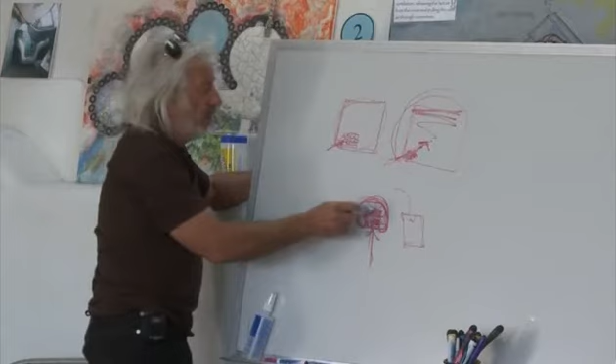People, all the engineers and scientists, were trying to build mass into houses. We were already fooling around with building houses out of beer cans, so we looked around at what else there was a lot of on this planet, and it was tires. We started stuffing dirt into tires and beating it into them.

So you have a tire that is a steel-belted rubber casing, and you beat it full of earth. You have a 2.5-foot thick chunk of mass encased in steel-belted rubber. The material you're using is dirt, which is everywhere. Tires are really everywhere - indigenous to the entire planet. If you came here from another planet and saw all the tire piles, you'd think they grew here just like trees. And in fact, they do.

We've been everywhere - Bolivia, India, everywhere we go, they've got tires just like they have trees. So they actually have a problem with tires. You never hear anybody saying there are too many trees, but you do hear people saying there are too many tires, and too many people probably. But anyway, tires are indigenous to the entire planet.

They're a great, massive way to build. They're low tech, don't require equipment, require very little training. When we were trying to evolve a method of building a mass building, we stumbled onto this, and that was 30 years ago, and we really haven't found anything better. In other words, if I found some better way to achieve a massive structure, I would use it immediately, but I haven't.

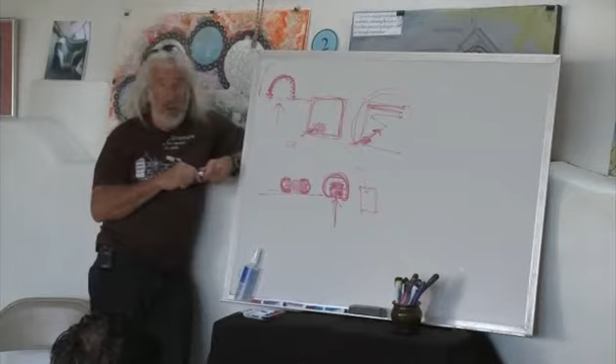So what that did is launch us into taking this science a little further, like in the early sections. What I'm getting you to do is understand why these designs are the way they are. People come here to build these for a living, for themselves, or to share the information, and it's important to know we're not doing these because they look cute. We're doing them because we keep finding more ways to fine-tune this encounter with natural phenomena—the sun and the thermal mass in the earth.

And the thermal mass concept—so what we have is a section that we used to just have the tires stacked up, and here we have a roof like this. We've evolved out of that, and I'll talk more about that in the water situation.

This is the angle in this building—this is the angle of the winter sun, to bring the winter sun in here. Even on corner cottage, I believe we still have this. We do this roof slope to let the sun melt snow before it evaporates. But we've evolved out of that.

So this was our configuration 10 years ago. The configuration now has evolved—we've gotten a way to melt the water with the sun, which makes for more details and expense. So now the newer designs, which we call the global design, have a roof that is one configuration, one line.

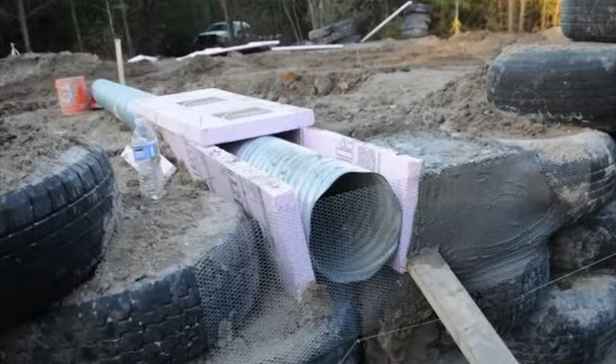And these tubes are buried in the berm. So we have what I think physicists call a convection engine, convection-driven air movement. No fans, nothing, but there is air moving.

People would sit around this at lunch because they're coming in from working outside in 105 degrees, and sit around these tubes and put their bottles of water in them and all kinds of stuff. You could see it was working. And this is with no fuel.

So now we've taken this configuration that we got busted for a decade or so ago and taken it further, removed the heat loss of the skylight, created even better ventilation, and done one more thing.

We do now what we call a thermal wrap, and you can see this. I think we've got one under construction called the Global, across from Corner Cottage.

Thermal wrap is where we take rigid insulation and go out another 3 feet from the tires. So now we have trapped more actual earth mass to work with the tires. The tires become the structure and mass, but we're adding another 3 feet to that mass by isolating it away from the cooler earth, because it's the cool earth that cools off this air.

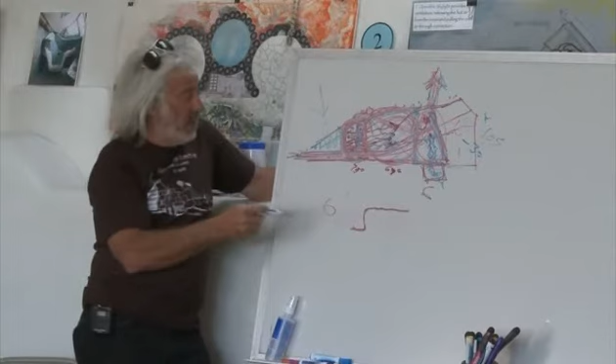I'll get into that. But if you're playing with an idea that has to be purchased, it's got to be the same price as the other things on the market. So manufactured housing is what is the biggest seller, that's what people buy. So we came up with a package design that worked for that, and it just had a vertical face. We call it the package design because it was so simple that we could provide a kit almost that people could just put together, and we could make components.

We were aiming at making this more user-friendly, because these older buildings had a lot of strange details that required more skill. So we were trying to make it so you could just assemble the building. And they worked pretty good. We did a lot of them.

And then we added a double greenhouse to it. And then we got rid of the sloped roof because we decided we could heat the roof with solar rather than having to have it shaped to face the sun. So the package evolved into a double greenhouse package, and that evolved into what we call the global Earthship. We've got a lot of these going around the world now.

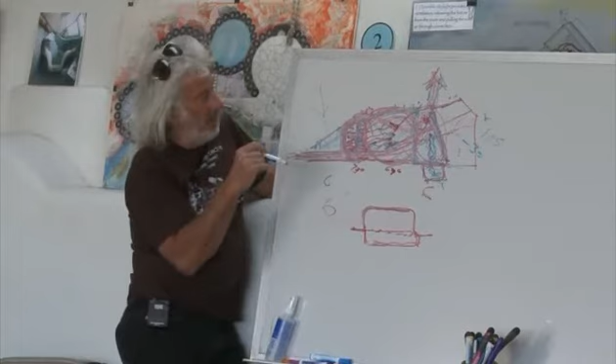We can do one of these, like we just came back from Miles City in Montana, where we put one up in 8 weeks, totally turnkey, everything working, 2-bedroom. So we got the time down, we've got it to the point where this is a product now that we're ready to take out there.

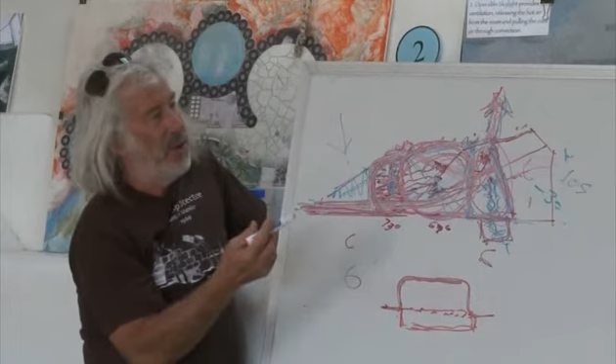There are 6 points to these buildings, most of which, half of which at least, I'm going into tomorrow. They are built where, everybody's looking at carbon zero these days, and so building with recycled materials is a huge thing. That's part of the rationale for using tires, but not the only rationale for sure.

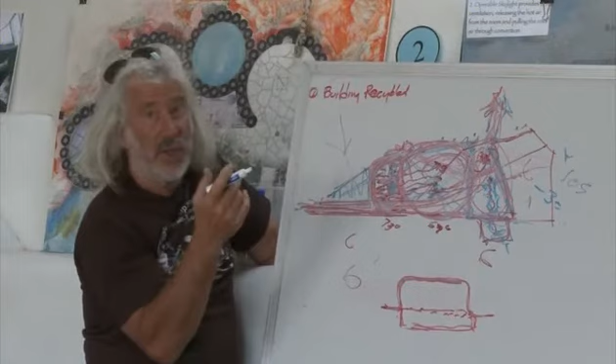And the cans and the bottles, we were doing that before we were doing anything. Building buildings out of cans just because the media started screaming about garbage being thrown everywhere, 30 years ago, 40 years ago, and it hasn't stopped. So we were doing that before the word recycling was even a word.

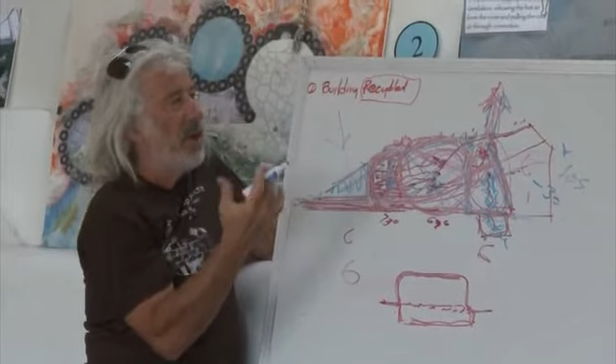So in terms of a carbon zero building, if you're using a material like tires or bottles or cans that is taking the place of a manufactured material, and that manufactured material takes energy to manufacture, you're starting off with a material that doesn't have to be manufactured. There's a double thing there - it also takes energy to do something with the cans and tires and bottles, so you're getting rid of that energy because you're using them rather than using energy to get rid of them.

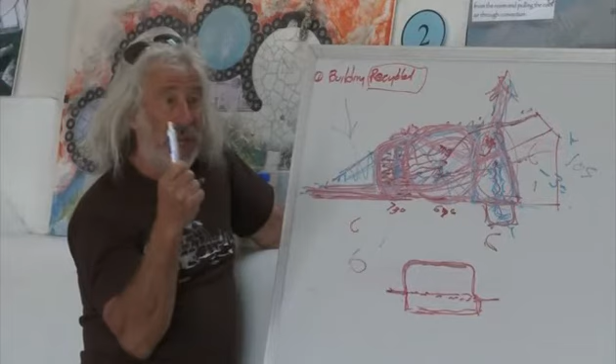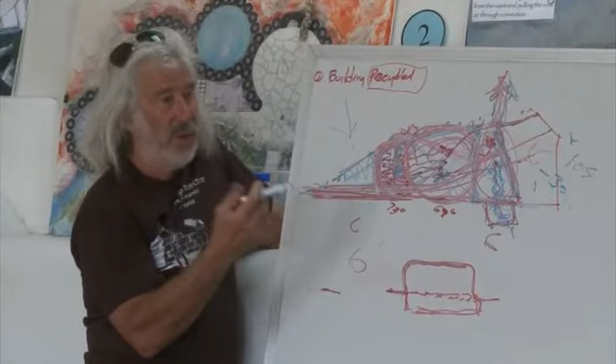I was in Norway recently, and they have a giant recycling company, but the energy used to recycle all these materials is unbelievable, really. And then they ship them somewhere. So shipping - you're taking the place of shipping because you're using a product that's laying around. You're taking the place of manufacturing because you're using a product that's already manufactured. And you're taking the place of disposing of garbage because you're using garbage. So there's 3 ways these buildings start off with actually a negative carbon footprint when you're going out there and pounding dirt into tires - it starts off negative because of building with recycled materials.

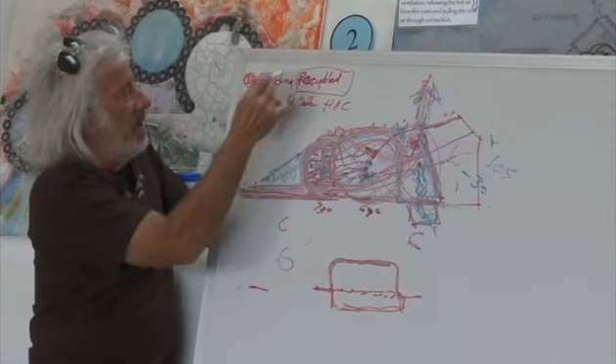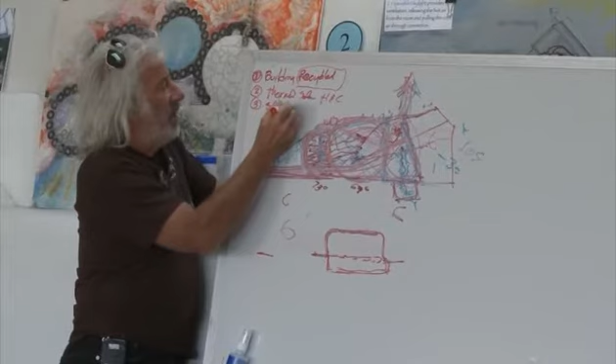Then thermal solar, which is what I've just been talking about, heating and cooling - these are the major points of these buildings: thermal solar heating and cooling, building with recycled materials. The design of the buildings is a result of what it takes to use recycled materials and what it takes to achieve thermal solar heating and cooling, and you can see how it's evolved. And then solar and wind energy, of course, which we'll go into tomorrow, and water from the sky, harvesting water.

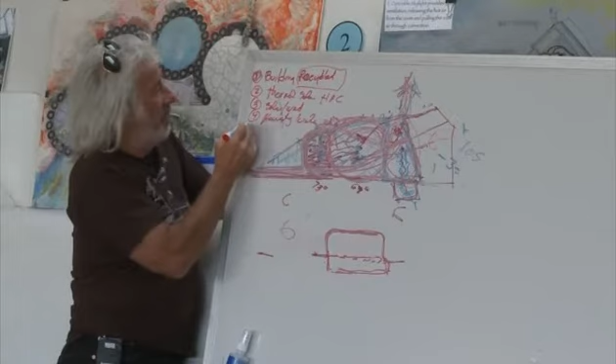And then contained on-site sewage treatment. This gets you off the grid, and sewage treatment is getting to be a big deal because sewage treatment plants halfway treat it, which takes a lot of energy, no pun intended. So it takes a lot of energy to treat sewage, and sewage is a valuable thing. Sewage to me is gold. It's compost. It's providing energy for food production, which is the sixth point.

So if we can make a building that addresses all of these issues, who needs the government? Only to hinder us from doing it.

Doesn't it also regreen, because the blackwater plants grow that wouldn't normally grow there? Yeah, and if you get to see some of the older Earthships, I have a great picture in one of my shows that shows one of the buildings here, and you've got the barren, deserty mesa, and his blackwater system, which I'll go into tomorrow how they work, has just gone off.

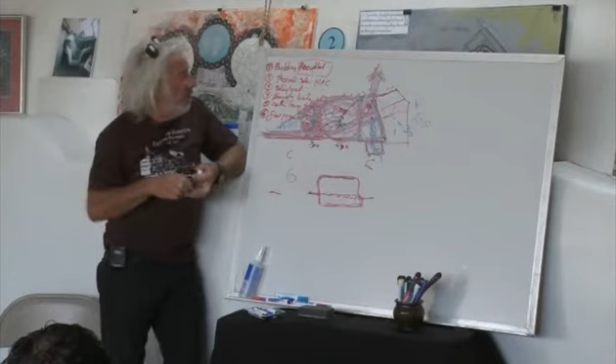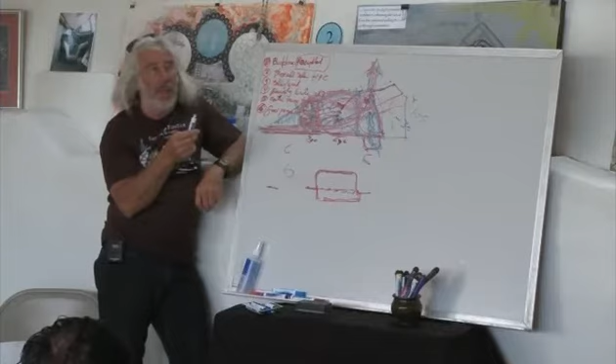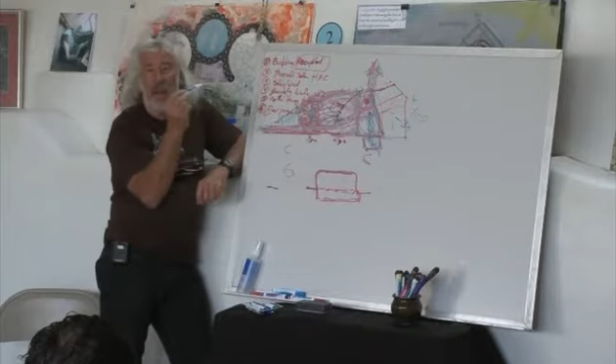But just think of this in terms of the issues in the cities and other countries, how much of a garbage problem there is. New York City's taking it out in barges and dumping it in the ocean. Everywhere I go, the first thing they do is take me to the dump, and there's mountains of tires and bottles and piles of refrigerators and ranges. We've got ways to use all of that. I imagine Kirsten showed you how we use the washing machine and refrigerator panels. That's new in the last four or so years.

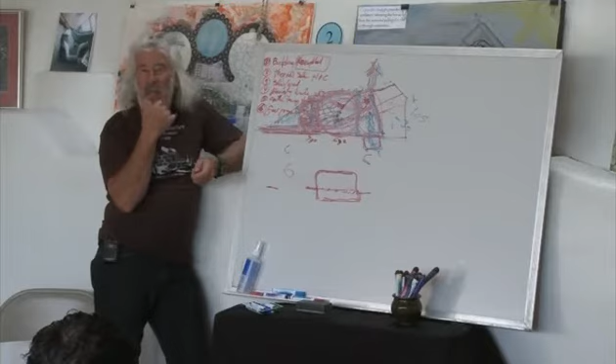I was in Hawaii talking to grade school kids, and they took me to the dump, of course. It was the little island of Molokai, and that's where I first got this idea. I'd seen this before, but there was a big mountain of refrigerators, ranges, washing machines, appliances that went bad. We had been switching our roof material to metal because metal catches cleaner water, and this mountain of washing machines were all full of baked-on enamel yellow and green panels of metal, nice colors and everything.

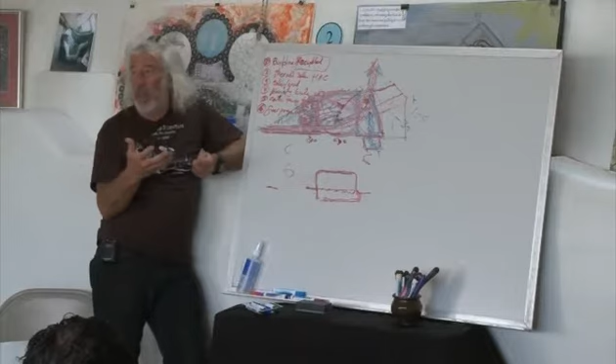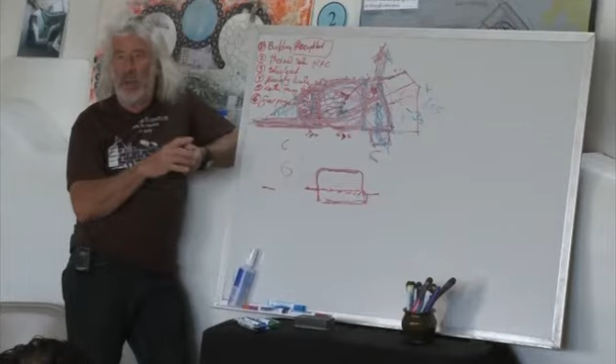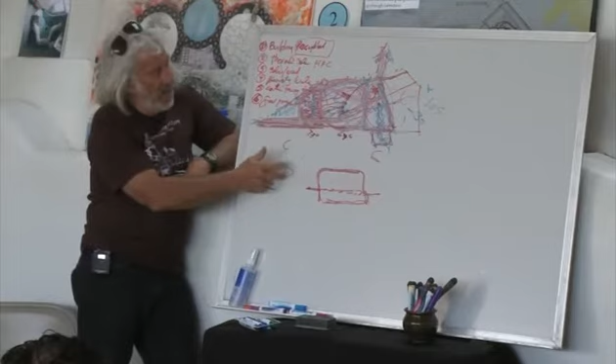So after I came home from that trip, we went to our dump, and sure enough there was a mountain of refrigerators and ranges. So the crew went out there. We took a solar array and a solar trailer so we could plug in electric snippers. If this is a panel on a washing machine, you just stab the corner of it, make a hole, take the electric snippers and snip it out, and you've got a panel. So we just go to the dump and harvest metal.

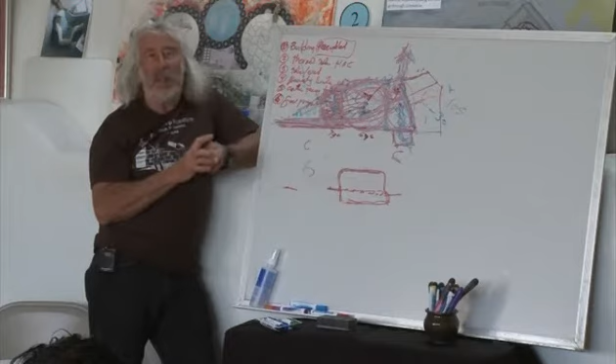You'll see it when you go to Corner Cottage, it's got some of it; across the street the New Global has some of it; and the Phoenix has got the best application of it. It's like artwork there. As a matter of fact, I just got a new 1970-something Mercedes that was all beat up, and we patched up the body with washing machine parts. It's beautiful, looks like paint swatches you find at the paint store. We found a couple of pink ones here and there, and we really like the pink, so we painted some panels pink with metal paint.

But anyway, we're harvesting metal now out of the dump for roofing. Every city and country has serious issues with garbage, in terms of what to do with it. When they do something like Norway does with it, to me that was scary. They had a factory of machines chewing up energy and trucks hauling it off to other parts of the world. To me that was insane. They thought it was great that they had such a giant recycling situation, but I was just seeing energy used like crazy to recycle.

All we're doing is gathering stuff from the dump: bottles, cans, tires, cardboard, washing machine parts, and we'll continue to find other goodies. So building with recycled materials is just a logical thing. There's really good materials, and in fact I can't find, manufactured or not, a better material than tires to build with. If somebody gave me $30 million and said develop the best building material you can find, I'd probably invent a tire.

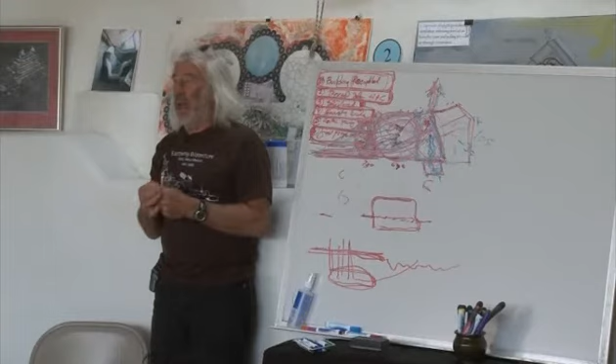And I have, for the last year, had a garbage can sitting in my office full of compost, reading out the thermometer as it was going up. The guys helping me, I sent them to Walmart to get me a garbage can. I told them what I was going to use it for, but they just didn't snap to it, and they came back with a plastic garbage can, which would have just melted.

But this heat bulb thing is just another trick involving biology and physics, to buy more heat without actual fuel. So this is how we're taking this to areas where there's ridiculously less sun. But every city and country is facing all these issues, and we've taken each one of them. If you consider these like systems of the human body, we've interwoven them, and they're all interrelated to come up with this building now that we call the global Earthship.

And we have a couple of examples of it here, and everything else is a prototype leading up to it. The Phoenix is the best example of all of this put together in a more flamboyant way. It's not what I would call an affordable application of all this, but it certainly shows it in the most intense way that we can. So what I'm getting at is, through the last few decades, we have evolved each one of these things seriously.

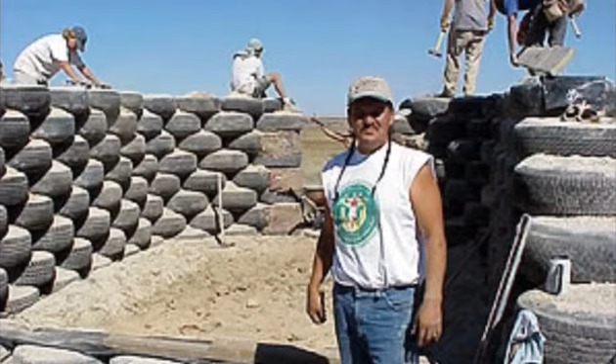And so they have land now. They have a lot of money from gambling, and they got no rules. They could take the lead. Third world countries can take the lead because they aren't encumbered by all these rules and regulations. And in this country, we're taking a map of the U.S., whatever it's shaped like, and...

We're going to map it online because there's these places we call pockets of freedom, like Montana. It's actually, this is supposed to be a free country. Well, let me tell you about it. But there are places like that.

We've just noticed this recently, but we've got people selling drawings all over the world and then hacking through the permit process with them and sending off engineer reports and tests and studies and all kinds of stuff.

So it slows down the process of getting carbon zero building out there. And it's not, I can't really find whose fault it is. It's just the human condition has woven a set of rules around itself in the developed world to the point where they can't evolve without taking a tremendous amount of effort and time, and we don't have that.

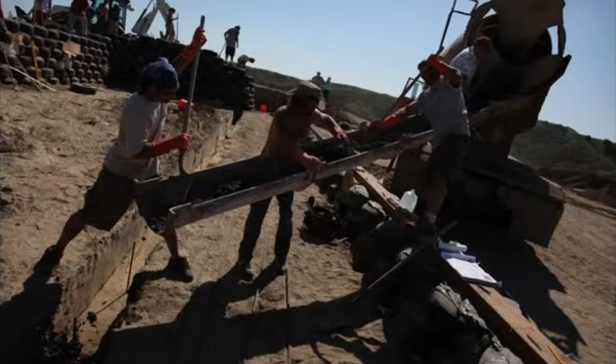So it's an extreme contrast to have somebody walk in our office and a month later we're building a building for them in Montana. And that's happening. It happened twice in Montana, now it's happening in Texas.

So what we're going to do is map the counties in every state, because this county that we did this building in, Miles City, you don't need any permits. In Montana, is the governor Schweitzer?

Does he know what you guys are doing? Because I'm not sure. As a result of our build there, they're wanting us to tell them about our gray water system and things like that. But I imagine it everywhere we go. It gets in the paper, so I imagine they're aware of it.

We're not sure whether we're going to do harm or good by pointing this out, but you take Montana and Idaho and the Dakotas and you start coloring in all these counties where you don't need permits. And now in Texas, we're in East Texas, no permit needed.

In other words, the guy came in on East Texas. He came and stayed in Corner Cottage a few weeks ago. We're going down there in 3 weeks to throw up a building for him. No permit needed. So what I'm saying is green carbon zero housing can, boom, exist instantly in lots of places around the U.S.

And then, this is almost like the maps they make of the Democrats and the Republicans. You got the map of where you're free to take care of yourself and where you're not free. And it could be that a lot of people end up moving because it's beautiful land. See, some of the most beautiful land in the country is what they say is worthless because it has no utilities. And it's also worthless because it doesn't have any rules and regulations.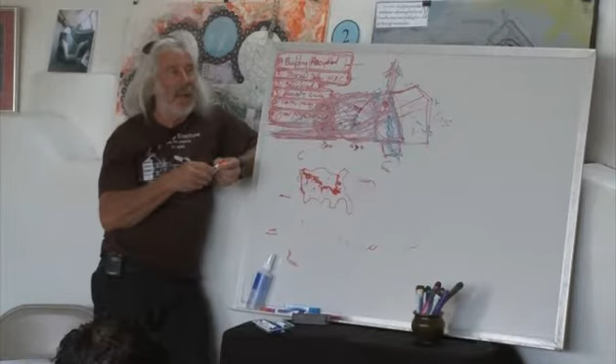So there's a lot of that in this country. There's a whole lot of it in the rest of the world. Europe is one of the worst for not having it, but there are pockets in Europe too. So there are places where what we're saying now is, yes, we're still working on the codes and regulations and trying to go through the regular path, which is more time consuming and so on.

But at the same time, we are going for these pockets of freedom. We have sort of got one here because of 2 decades of fighting.

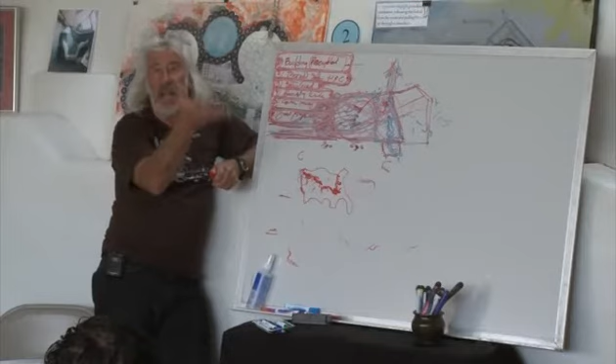I'm just curious, has your fight gotten any easier now that you've found these pockets where you've built them and proven that it can be successful? Are there other areas that have been fighting you that are becoming a little easier to get this done?

Well, there's no question that with the media, now it used to be global warming was kind of a freaky thing you didn't talk about, and now it's everywhere.

Every time you turn on the television, there's something about climate change. So it is getting easier - people are at least listening and looking at it, but they always come back to the same thing: it's a government employee with a rule book, and he'll lose his job if he doesn't enforce it. I've even had him apologize to me for having to enforce it.

We introduced this law and fought through it for 4 years. And so I realized, yeah, you can make new law and change things, but we don't have 4 years - we need to do this every week, every month. So we've now evolved the law into what is known as an executive order.

An executive order is a tool that any governor or president has. We wrote one for the governor of Arizona and for the governor of New Mexico, who's now on board with us, so to speak.

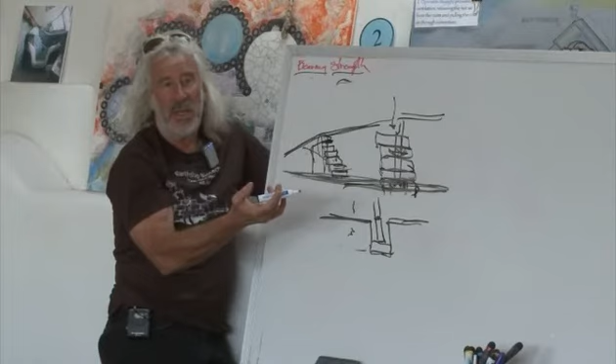So in a buried Earthship, we recreate the frost line to the point where it has no effect on the building. The greenhouse out front usually has a couple of tires, sometimes 3, and we put the leaning face on the greenhouse, then insulate that, bury it out a little. It's the insulation again that keeps the frost line from getting into the bearing of the tires.

A concrete footing is brittle and rigid, and any heaving will crack it. If you did get heaving on a tire wall, there's no way it can crack - it's resilient. It's hard, but it's resilient, because it's earth, and earth over time is more liquid than it is rigid. So any heaving that would happen is not going to have much effect, if any. We still block it with rigid insulation.

On the vertical bearing strength, have you ever calculated pounds per square foot? We have an engineer report that got into that - I read it but couldn't see any max. I don't think they've come up with a max of what it would take, other than the concrete truck driving on the tires - that's going to be about 2,000 square foot.

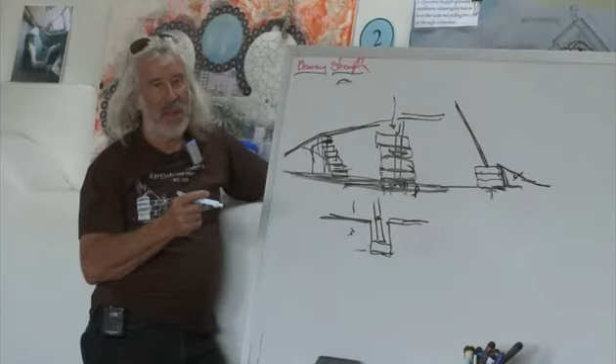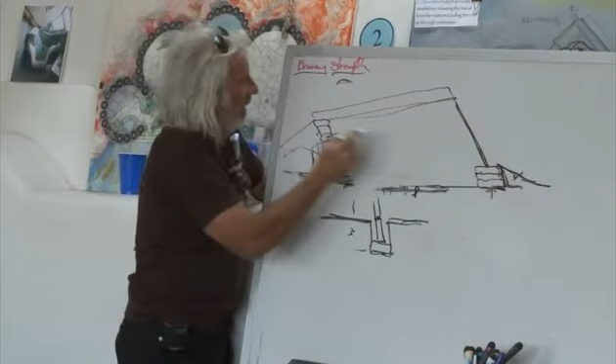What are the considerations about putting earth over the roof? We've done that in the old days - it's nice, it's a soft situation. I'm into the aesthetic effect of these things being as soft as possible - burial, roof structure, insulation - in a case like that you bury the roof. The reason we steered away from it was we started observing that a person standing in a room, the ambient temperature they feel comes from up to their head height, and that's it, because this is all about ambient temperature, not like a forced air furnace.

Having mass above your head doesn't really achieve anything. What it does do is make your structure have to be a whole lot heavier to support it.

When you have grass on your roof, you don't catch near as much water. In an area like this, that's why we've gone to metal roofs, because they're so sensitive we've seen the gutter dripping into the cistern from morning dew. You won't see that on a grass roof because it gets absorbed. So due to water catchment, weight, expense, and lack of effect, we don't do grass roofs anymore.

The roof on this building was a material called Brai, and it goes on with a torch, and it catches really nasty water, so we put acrylic coatings on it to make it catch cleaner water, and they peeled off. So then we spray foamed it, which you can't get all over the world. This was a learning experience.

The next two buildings are this EPDM material. It's a rubber. It catches pretty clean water, and it lasts 10 or 15 years, and it's going to need repair over there on that one pretty soon.

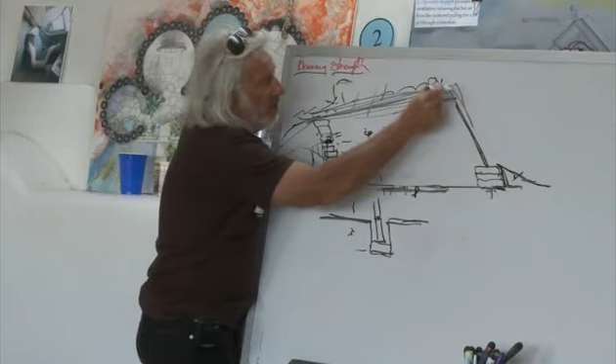I'll go into that more thoroughly tomorrow, but since you asked, I'll answer part of it. This building was old school. Kirsten probably showed you up at Reach, the steep community in the mountains. What we observed up there, they get more snow than down here. There'd be 2 feet of snow on the roof, and the roofs were north facing. The glass on the front was south facing. We'd get 2 feet of snow on the roof and just watch it evaporate, no water. We had one other roof that, just by chance due to the mountain, was sloped the other way, and we watched that roof on a day like today melting and water running into the cistern. Observation was a south-facing roof is going to catch water, a north-facing roof is not.

So we changed all of our designs to do this south-facing roof, kicking back up with the greenhouse, just like here, to south-facing roof. It could be very subtle, we observed, to get just a bit of sun rays on it to melt the snow, kicking back up at the winter sun angle to still get the heat. This created a valley which caught water.

But due to our inexperience in water catching roofs, if you've got a roof like this, you can make a mistake and you may have a drip. If you've got a roof like this and you make a mistake, you've got water on a coffee table in a living room, and a lawsuit. So, back in court.

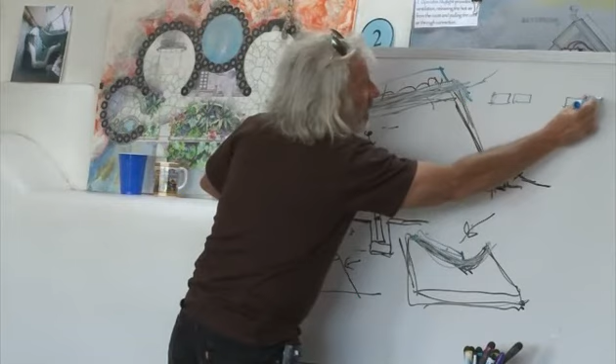On the front of the Sutton house, and I'm getting a little into systems, which is more tomorrow, you're going to see the photovoltaic panels, and then you're going to see these 2 square panels that collect water to heat the roof, and in between them is another little panel that runs the pump that pushes the water. So it doesn't

steal power from your domestic household power system. It just, whenever the sun's out, you've got water melting your roof. If you don't want it, you've got hot water for your bath. And so that's just—

we consider all of these things, we keep learning, we keep evolving, and the building keeps getting more simple, easier to build, and cheaper.

Did you have a question? Yeah, when you go to design a custom Earthship, what are some of the things that go through your head? Things that go through my head... in 5 words or less... let's see, bacon, margaritas.

Well, in a way that's a good question, because first of all, I try to talk people out of doing a custom Earthship, because a custom Earthship is not as good as this. It's like going to Dodge Motors and there's a Chrysler sitting on the showroom floor, and you want to customize it. If they would even do it for you, it'd cost a fortune. The thing that they build is what works. They just build more expensive ones or cheaper ones.

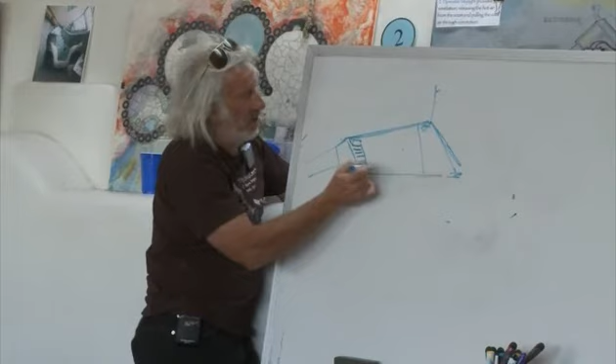But I do customize the buildings to a particular climate. For instance, getting back to our same global Earthship that I've been drawing all morning, with the battered wall, the thermal wrap, the now north-facing roof that we've explained, the double greenhouse, the convection engine and the tubes and all of that—if I'm going to apply that, the first thing I do, when a client tells me where they live, is I still start with this design.

But then I get the annual rainfall. If they have a lot of rain, that means I can have smaller cisterns and probably have to have more solar panels. I also get the rainfall, and I get the winter low and the summer high. Here our winter low is 30 below, not sustained, but every once in a while in the night in winter it gets down there early morning. And summer is 105 or so, 104. So if you've got a winter low of 40 below, I collect that data.

You get 40 below, but another thing I look at is the number of sun days. We have about 300 sun days a year here. Someplace in Maine may have 35 or 40 below, similar to us, but they only have 200 or 190 sun days a year. That information tells me how to tweak the design.

So in a serious situation, I'd say probably add a third greenhouse. You'll see it at the Phoenix—there are places there that have three glass faces. Then the thermal wrap that we put around the building to insulate the mass, we'd take it and put it under the floor, just in the living area where the people are.

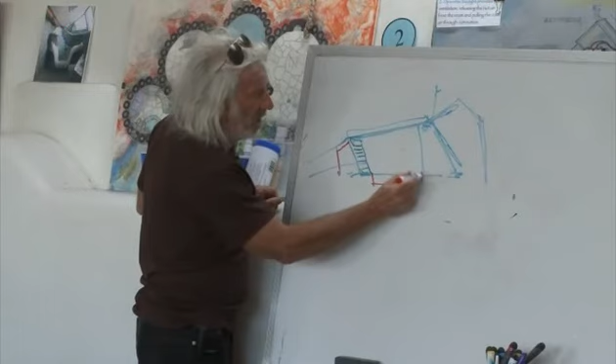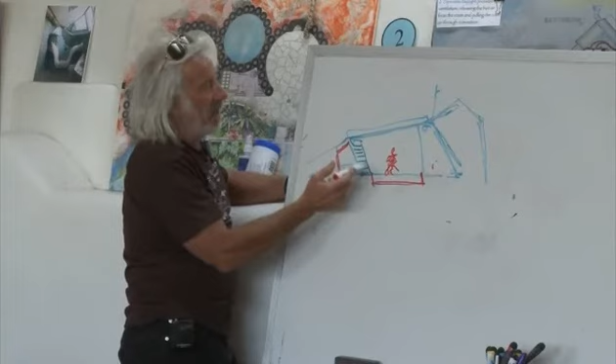We don't need to put it under the plants, but you'd go down and insulate about 18 inches, because you're trying to stretch all of these aspects to give you a little better performance to make up for the lack of sun. There are tricks like that. The things that are adjustable are a few tweaks on insulation and the greenhouse. If you have less sun, then your power system—which I'll get into tomorrow—needs more panels.

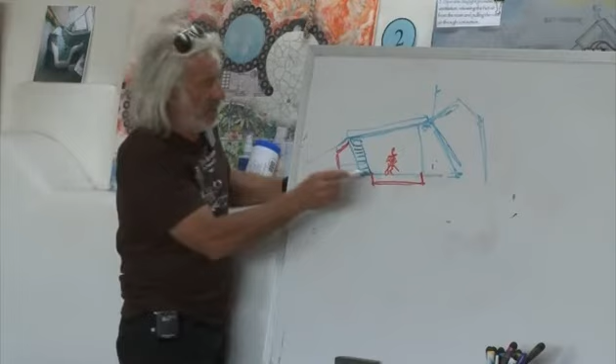Like we did one in Vermont—we insulated the floor like this, and we simply doubled the power system. We found out they have about half the amount of sun days as us, so we doubled it. We actually put two full power systems in.

And that's interesting, because these power systems are designed for Earthships. You can't take our power system and hook it onto a regular house, because a regular house has a lot more demand.

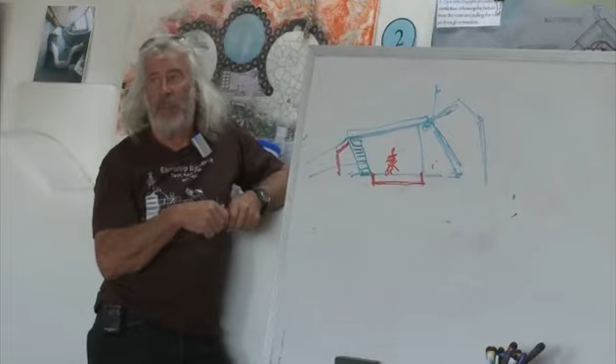The things we've encountered have taught us to point that out to people. We built one of the early buildings before they were called Earthships—pit houses, which worked similarly—just before we copyrighted the name Earthship. The people moved in and everything was working. Then one day they called and said the power system wasn't working. I talked to them on the phone for a while, trying to troubleshoot it.

I was quizzing them, trying to find out why the power system wasn't working. They said, well, we got some guests. I said, well, guests can tax the situation. They said, it's not really hurting anything because they're over here in their Winnebago right next to us. But the Winnebago was plugged into the house, with all its fans and refrigerators and everything. It took me an hour on the phone to find out they had plugged a Winnebago into the building.

The power system is made to run the building—it's not limitless power. So lots of things like that have happened, and you have to point out to people: this power system is integral to your life in your home, and if you plug in your Winnebago, it's not going to work.

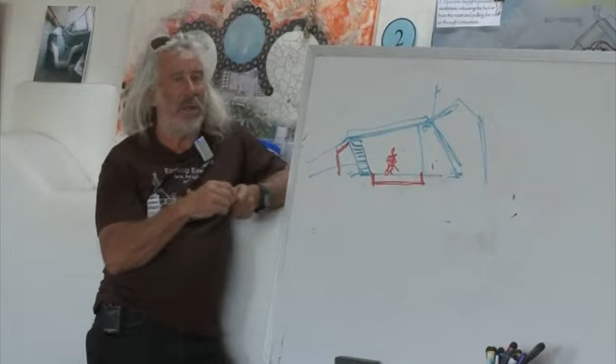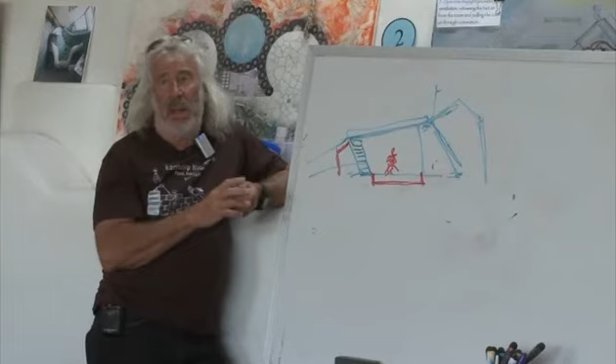In your opinion—since you've built these all over the world—is there one climate that's easier to build Earthships in, that makes it cheaper, easier, that makes it perform better? If you had to choose one, obviously sunny climates are easier because you can get more power, more energy. Sunny, cold climates—but we've done them in so many different places that our effort is to make them a universal design that can take care of people anywhere.

We used to have, as you can see, all these different designs, which are really going to go away in our new education facility because we're going to be presenting the current situation more. We've gone through so many different designs, and they were all evolving due to the different climates we were encountering. We started seeing that if we could standardize a design that just gets tweaked for every climate, it becomes more available to people.

Because that's the big thing: whatever you do, it's got to be easy for people to get it, to acquire it, to build it, to buy it. If you get too much custom tailoring, it just makes it too expensive and keeps you from standardizing. The automobile industry, and other industries, have done a good job of standardizing their product, no matter how bad the product is—they've standardized it so people can get it. We learned from that, because part of getting something out there is making it so people can obtain it somehow.

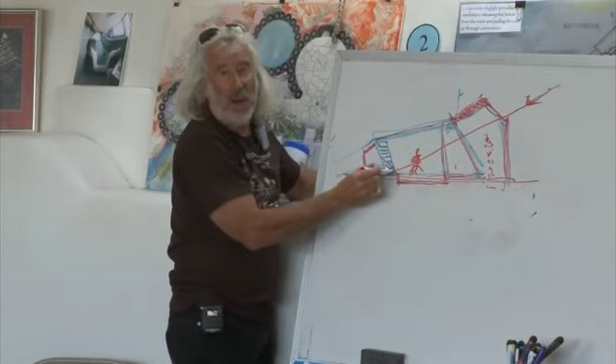So in a northern climate, I match this line with the winter angle of the sun so that this structure - this is glass, this is insulated structure - so that the sun makes it all the way into the house still. I don't want to block any sun with this buffer zone. I just want to trap more temperature so that minus 40 degrees is not felt all the way in here where the people are. So I'm still trying to get the sun in.

Wouldn't it be cheaper to just go straight from that highest point to the lowest point in the back, and not have that detail? Yeah, like why not do that?

Well, if you're going to do it from the get-go, yeah, that could be structured that way. But since, in our efforts to standardize, this global model is worthy of standardization, then this is an add-on to the global model. So rather than change the whole structure of the global model, we can keep it standardized and add this. And when you do add this, you find you have to adjust it, so you'd be dealing with a separate set of drawings for every latitude, and we're trying to avoid stuff like that.

Yeah, actually I have 3 questions. One, can you talk a little bit about what affects room depth? If you have a U, I think Kirsten was saying you have the ability to go a little bit further from the greenhouse.

Yeah, well room depth was, in the early days, a discussion, because if you have a mild winter, then you can make the U's pretty deep because you're not getting that cold, and in fact it's cooler back here in the summertime. And if you're having a severe winter, you make the rooms more shallow, because then the sun and the airspace you're trying to heat is less relative to the similar glass space. In other words, this is considered your source of heat.

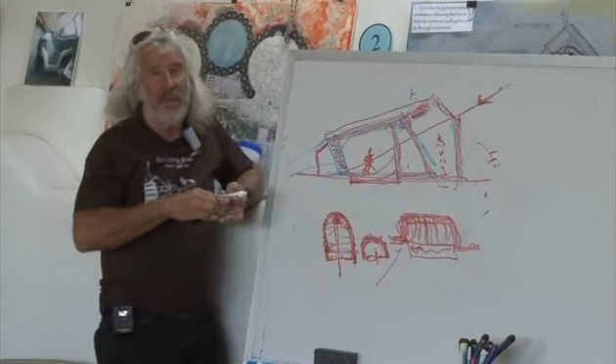They are really cool because you can lay there in bed and look up at the stars, and there's nothing to the light, but see, the buildings are more shallow than this. So you go in the corner cottage, or then there's a couple of globals that are built - you're going to find that they're just as light as this room. You don't really need that light. They're just as light because they're shallower, and they're actually cooler because now the air comes through the earth.

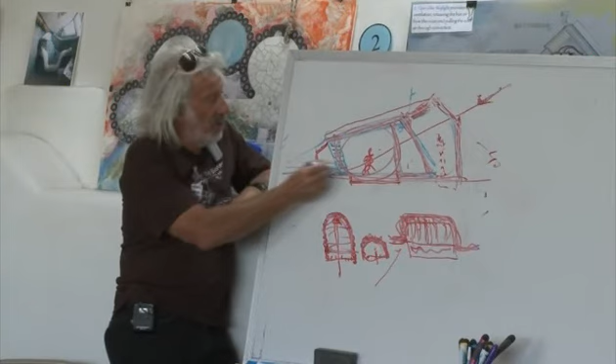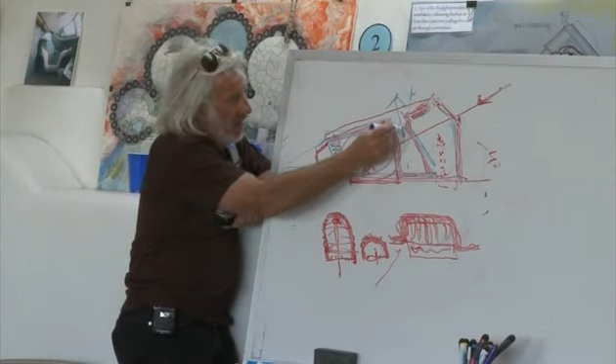If it's 105 degrees outside, the air coming through that window and out this skylight is not really anything but fresh air. Whereas if it's 105 degrees outside and we open up a convection-driven air current that sucks this air through 8 feet deep, 30 feet long of buried dirt, you have an air conditioner. It felt, up in Montana, like the air conditioner in your car hitting you in the face. And so we have better movement of air, cooler air, and no openings in the roof.

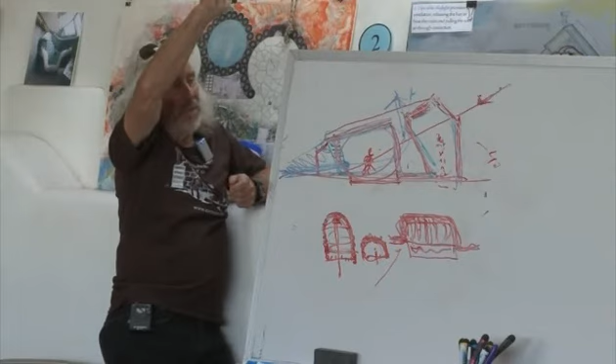Like you go up on the roof of some of these newer buildings, you're seeing no detail. Detail is money, detail is time. We're after the thing - so what I'm saying is time and money do affect design, because that's going to make it available to more people if it's not full of detail. Like my original - and I still look at things this way.

First of all, I want it to work. Like we're working on this heat bulb thing now. I don't care what it costs, what it looks like, how much space it takes up. I want it to work. I want to be able to put one in a corner of a room in Norway and have it emanate heat, and I'll stop at nothing to get that. But then after I get it working, then I'm going to try to make it affordable to people to buy and easy for people to acquire, and on and on.

So the first designs we had with the overall building were, we don't care what the building looks like. A lot of the ones Kirsten showed you looked like they landed last night. They weren't marketable, but they illustrated to us that you can do this. So I keep that thinking as I go through, to get more into your question too.

Whatever it takes to make it work without fuel, I will do it. Then I will try to take it into the economics and the simplicity of making it more available to people. But there's no sense in making it economical and available to people and easy to put together if it doesn't work. I've got to go through the making it work process first, and that process is at all cost. In other words, there's nothing that should stop you from trying to make a building that doesn't use fuel. Whatever it takes to do that, you have to do it. And that's kind of how these things all evolved.

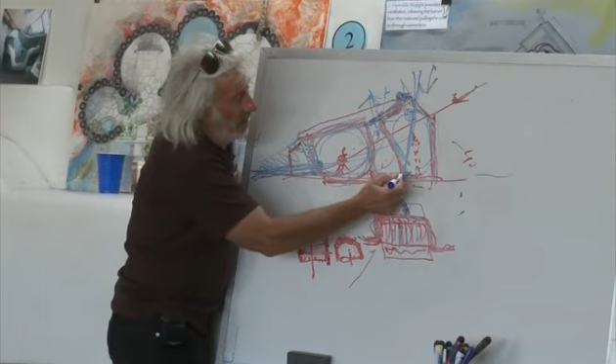So it's a question of, if you get way out here, here's the answer: 10 feet is a good starting point, then you get 11, 12, 13, 14, 15. The further out you get, the higher it has to get, because of the angle - you have to keep admitting the winter sun. So the volume gets so big that if you got out there far enough, it would freeze. For ours at the Phoenix, which you'll see tomorrow, I don't like for it to get below 50, let's say.

Reason being is because I got tilapia in there, and the lethal temperature for tilapia in the water is 50, and we lost a batch due to that. So now we've tightened the whole thing up and put a solar heater on the tilapia pond, and so far so good. We're eating tilapia.

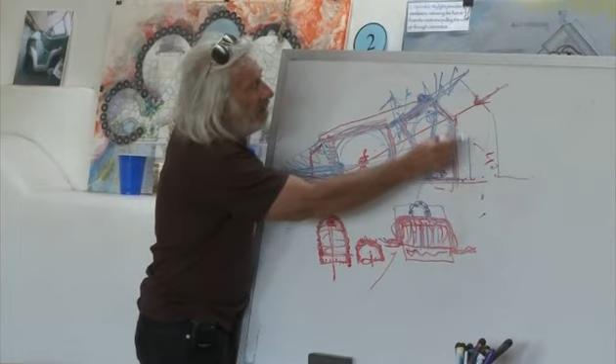So anyway, the point is 10 feet is a good beginning, 11, 12 maybe okay. Then when you get out there bigger, you're just reducing its performance and extending its cost.

What about adding a fourth greenhouse? Well, I haven't come up against a situation that would require that, but somewhere in Canada, I can imagine. We eat only raw foods, and so we would like to grow trees all year round, fruit. Would that be possible? Yes, I would say still you could do it in a third. Because you look at the Phoenix, you haven't been to the Phoenix yet? Okay, this should answer some of that. There's nothing wrong with doing a fourth, but I think 3 can give you enough.

If your house ends up being 80, 60, 80 feet long, and you got a greenhouse, usually they have food in here, and food in here, and some of them even have food in here. You got 3 areas to grow food, and that's another cool thing about the Phoenix is there are so many different areas.

You got all these little microclimates where salad grows best here, bananas grow best there. As a matter of fact, there should have been last night or today banana bread from the Phoenix, just harvest a big fat bunch of bananas. And we always have bananas. People, year round, we have bananas in all these buildings. One of the houses has got bananas year round.

And some people say you can survive on bananas. So you could have bananas year round. I mean, the Phoenix is just scratching this. It's huge, and it's been going on for 3 or 4 years, but it's just beginning to scratch the surface of what we can produce.